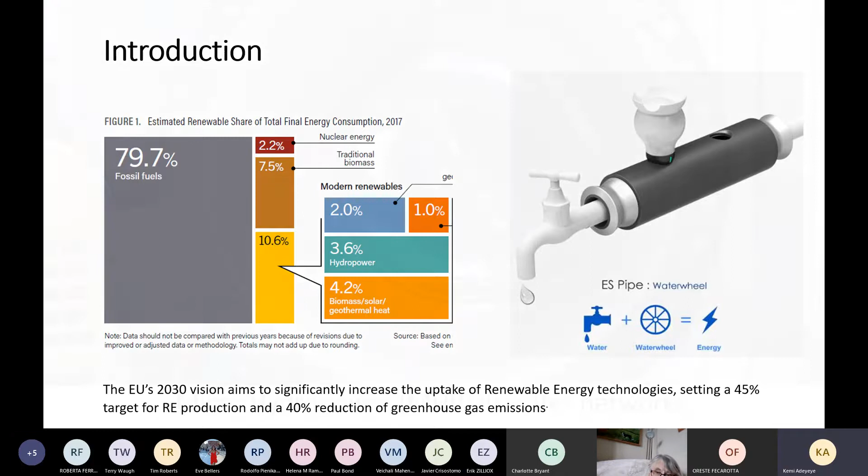Therefore, we cannot dispute that hydropower is a widely available form of renewable energy that can help to reduce the reliance on fossil fuels for the abstraction, treatment, and distribution of our water. It offers a more sustainable, non-disruptive, and economically viable solution.

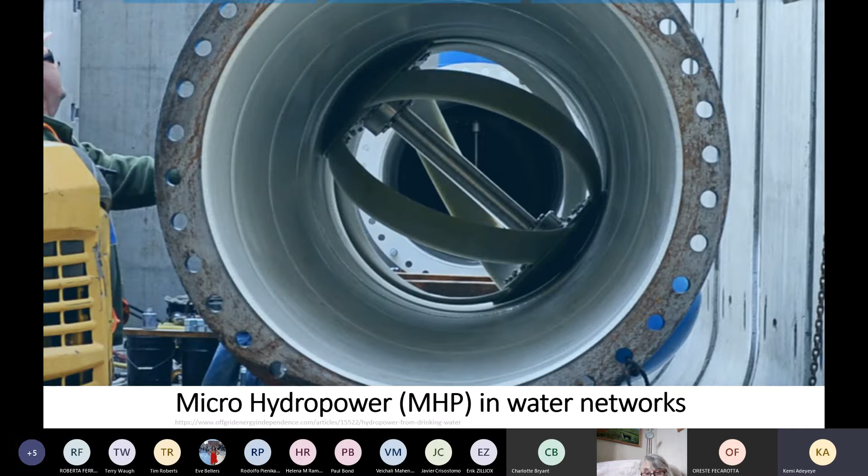For this reason, we're pleased that you can join us today to explore this energy recovery potential in water and wastewater systems, irrigation, and industry networks. The focus of our work is on micro hydropower. Micro hydropower refers to a type of hydropower that produces from 5 kilowatts to 100 kilowatts of electricity from the natural flow of water. Our studies have shown that about 650 gigawatt hour per year can be derived from water networks in the UK, Ireland, Spain, France, and Portugal alone.

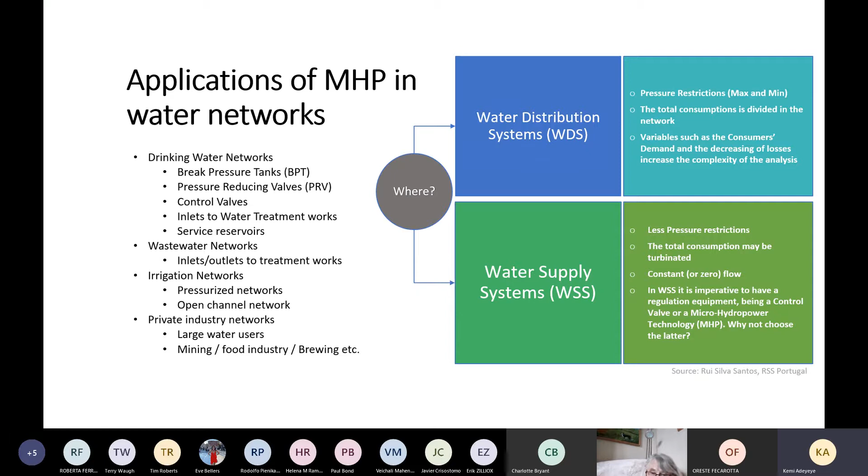As you will hear shortly, micro hydropower offers benefits beyond energy recovery. Across Europe, about 23% of water losses occur in networks. This equates to around 2,171 cubic meters per kilometer per annum. The appropriate design and location of micro hydropower and ancillary devices can help to achieve other network management benefits, including pressure and leakage management.

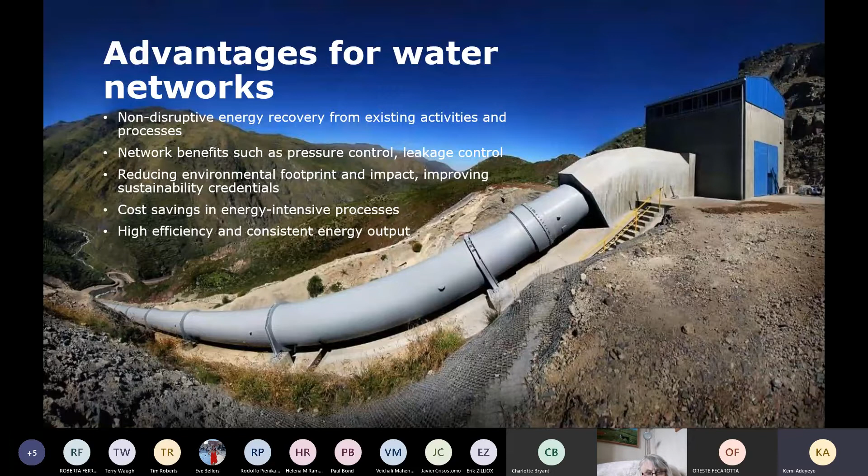Micro hydropower also offers all stakeholders the opportunity to innovate and do things differently. Climate change and other resource factors mean that there are water, energy-related risks that need to be addressed in the water sector. These risks have associated financial impact. Exploring and implementing renewable energy solutions, including micro hydropower, goes a long way in mitigating the environmental, social, and economic risks associated with our water systems and processes.

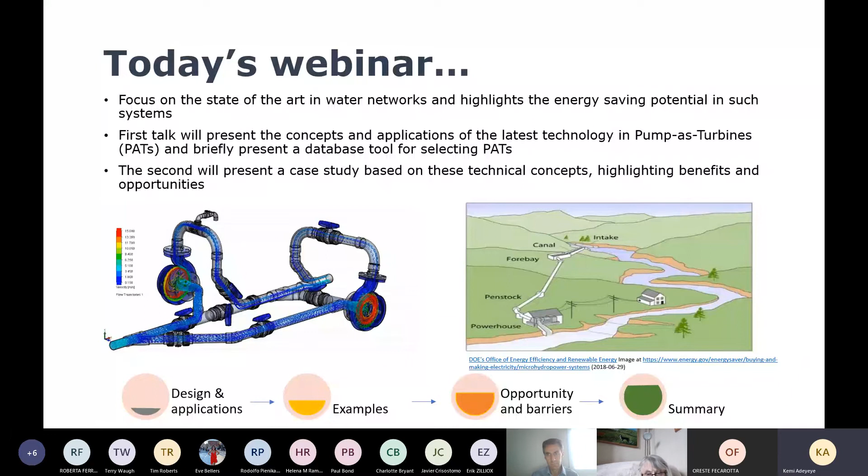Today's seminar will focus on the state-of-the-art in water networks and highlight the energy-saving potential in such systems. The first talk will present an overview of the latest micro hydropower technology, pump-as-turbines, highlighting its technical and economic advantage over traditional systems. The second talk will present a case study where this system has been implemented, demonstrating that this approach also works in practice.

It's my pleasure to now introduce our two speakers and expert panelists for today. Our first speaker is Professor Armando Carravetta. He is a full professor in hydraulics at Federico II University in Naples, Italy. He is a renowned expert in pumping systems, efficiency, and energy production in water networks.

He is also a member of the working group of the European pump manufacturers for the development of the EC standards for wastewater pumps. Our second speaker is Dr. Miguel Crespo. Miguel was a researcher at Trinity College Dublin. He is an expert in energy recovery and efficiency in irrigation networks using micro hydropower solutions. He is also a shareholder of a TCD spin-off, Easy Hydro Solutions Limited.

For today's webinar, I'm also pleased to welcome Dr. Oreste Fecarotta to the discussion panel. Oreste is Assistant Professor tenure track in hydraulics at the Department of Civil, Architectural and Environmental Engineering of the University of Naples Federico II. His research field is mainly focused on the energy recovery and efficiency of water supply and distribution systems. He has developed some research studies on hydraulic structures and on the rheology of non-Newtonian fluid sediment mixtures. He is also responsible for the equipment and lab technicians of the Hydro Energy Laboratory at the University of Naples. Thank you everybody, and now we'll start with the presentations.

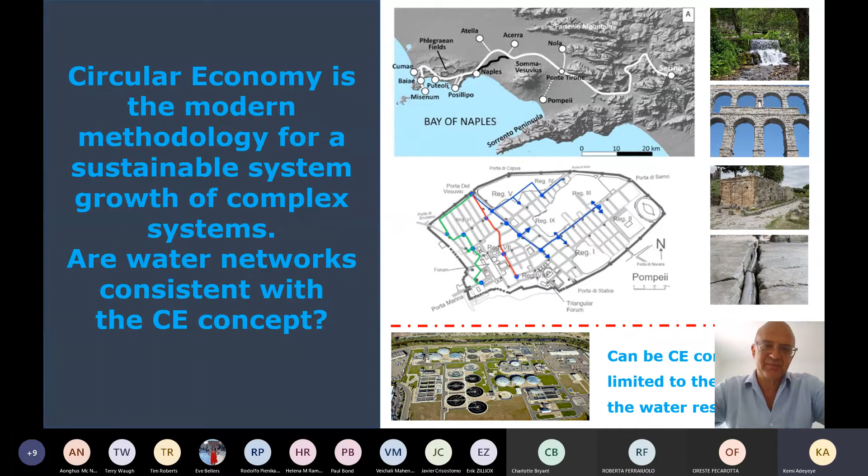The possibility for recovering resources in water networks comes from the fact that water networks are very energy-consuming systems, and a large effort has been made by the European community to improve this efficiency. This concept of low efficiency is connected with a large amount of water lost in leakage, which could reach 40–50% of the water at the spring.

Where is the energy used? Energy is used in pumping for water transportation from one point to another of the network, to overcome high points of elevation. Energy is dissipated to optimize the pressure, because downhill we need to reduce the pressure to obtain an optimal value for the end users. Energy is used in pumping for urban drainage, in the drainage network, and it is used in all phases of the treatment process. The treatment process is very energy consuming, and most of the energy used in water networks is used during the treatment process.

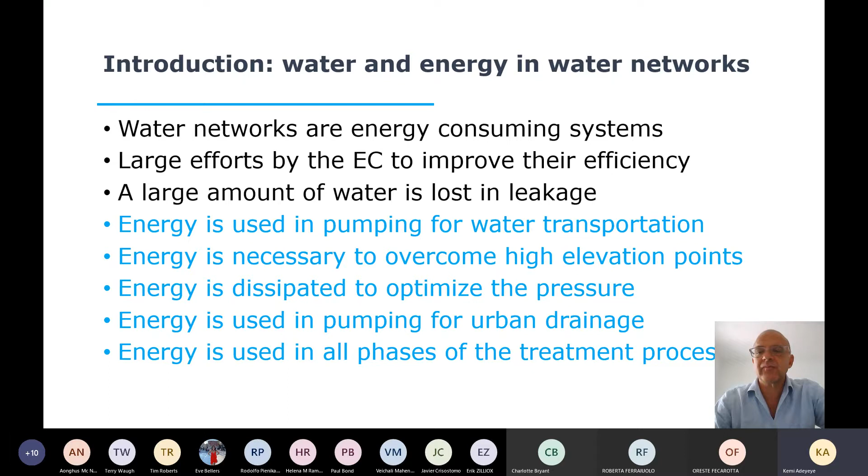The European Community already implemented circular economy concepts through eco-design. In this case, the European Community imposes the use of this circular economy concept by product innovation. So eco-design is the idea of producing better products and devices, in particular pumps for water networks.

In this way, much of the energy that is used now will be saved—not only through the product itself, but also through the integration of pumps with the motor and variable speed drive, and the integration of this group of pump, motor, and variable speed drive within the pumping system.

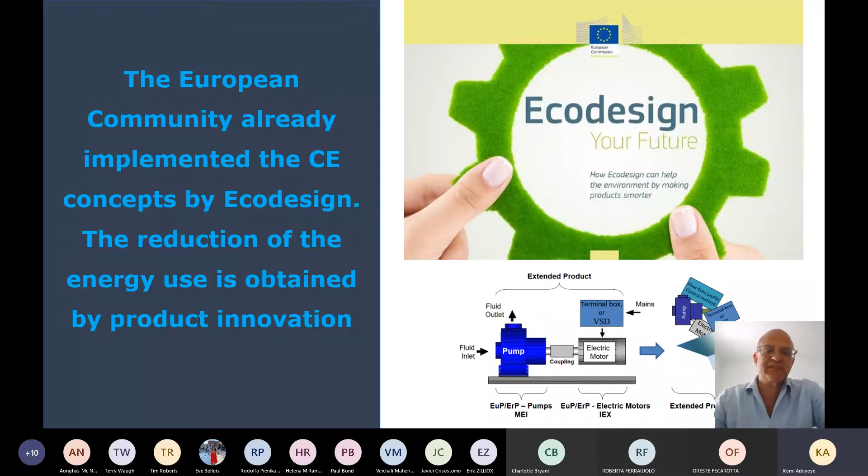The idea of eco-design is that it's hard to obtain savings from a process innovation because water networks are traditionally adequately managed. So in the meanwhile, we push for energy control of this network with new standards. But if we cannot use circular economy for process innovation savings, they can come from product innovation. Pumps and motors are under the eco-design umbrella, and a new minimum efficiency index was introduced for pumps, an extended product approach for pumping groups, so the pumps integrated with the motor and integrated with the variable speed drive, and the dynamic control of pumping systems.

That means we have to check with energy auditing that the correct group is used for the system where it is planned. With this energy audit, we have to check that all pumping systems at the moment are used properly. We can suggest changing some pumping groups that are not efficient enough, and we can check periodically that the new groups are well integrated into the system.

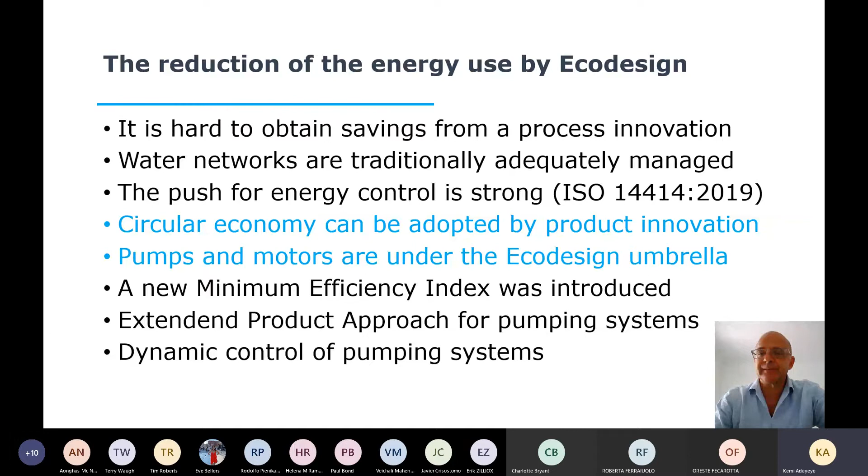Unfortunately, much of the energy stored in the system is simply lost. A large amount of water is lost in the joints and in the breaks of the pipes because of pipe age. And in this way, when we pump water, part of this energy is lost because we are pumping much more water than necessary.

In the meanwhile, the way to reduce leakage is to reduce the pressure, and this strategy has already been implemented. It means we have to flatten the pressure in order to have the best pressure across the whole network. So by reducing the pressure, we reduce the leakage, and by reducing the leakage, we also reduce the energy used in pumping. The novelty of our proposal is in recovering the energy that is now dissipated in the valves, the regulation valves, in order to have pressure containment.

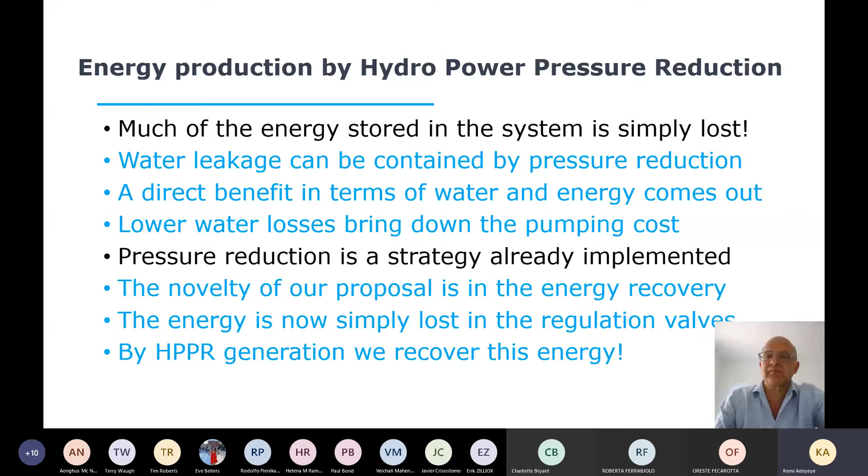We can explain the concept behind hydropower pressure reduction generation, which is the way we propose to recover this energy, by an analogy with F1 cars. The Ferrari 2008 was very different from the Ferrari 2009, not from the aerodynamical point of view, even if some differences are present, but because the brakes that were present in 2008 were substituted by a new technology still used in cars today, called KERS. This KERS is a motor coupled with the axis of the car, so when it's necessary to reduce the speed of the car, the motor comes into contact with the axis and brakes the car through its own resistance. The energy produced by the electric motor is stored in a battery.

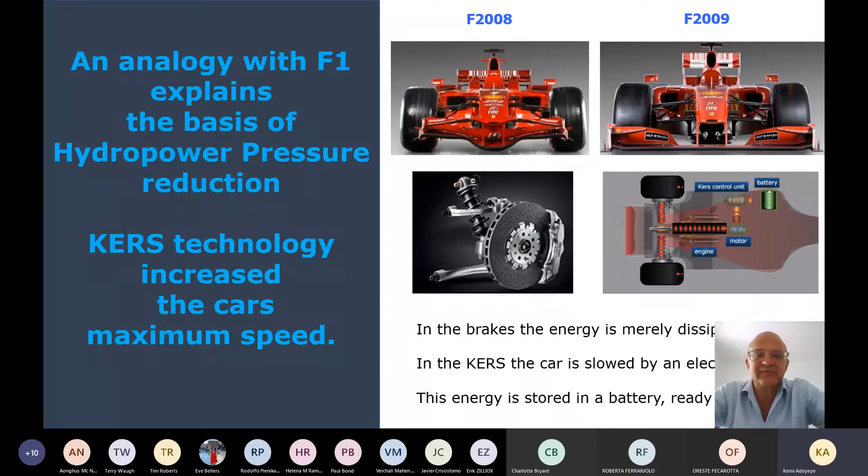The idea is the same as that used in our hydropower pressure reduction technology.

At the moment in water networks, energy is dissipated in the valves. So basically in a butterfly valve, a gate valve, or a pneumatic valve, the current is faster in the valve and then slows downstream of it, and this slowing of the current produces larger vorticity and greater dissipation. In our case, we replace the valves with a hydropower plant station, so the current passes through the turbine or the pump's turbine, and there is an exchange of energy between the current and the rotor of the turbine or pump, so the pressure energy is recovered rather than dissipated. This energy is then stored elsewhere in the electric grid, and the efficiency of the network is boosted, just like in an F1 car.

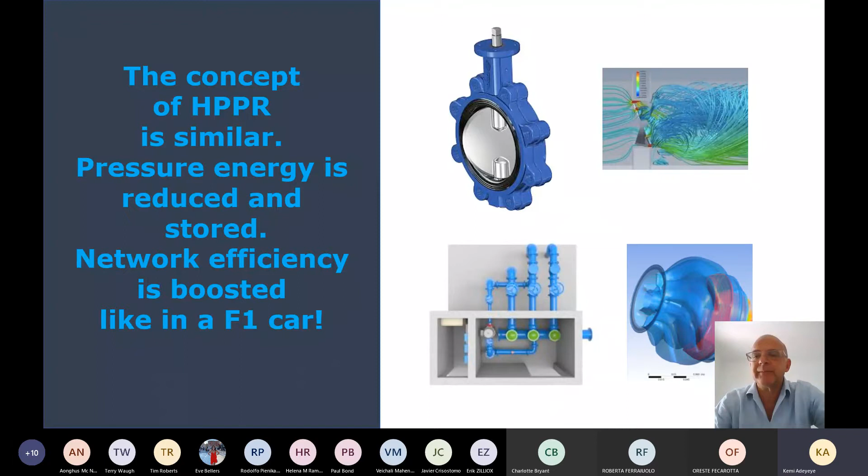Why is pump as turbine technology the best technology for hydropower pressure reduction design? Because we have a very limited hydropower size, so the power is generally below 50 kilowatts and can go down to 1-2 kilowatts.

Pumps as turbines are in this case the best generator for the water manager to satisfy the end user, and so they need a very reliable technology. PAT combines low cost and high reliability. Low cost is necessary because the hydropower site is small and we cannot spend so much on a miniaturized turbine. Reliability is necessary because pumps are very reliable devices, and so a pump used as a turbine - managers are familiar with pumps and will be familiar with pumps used as turbines.

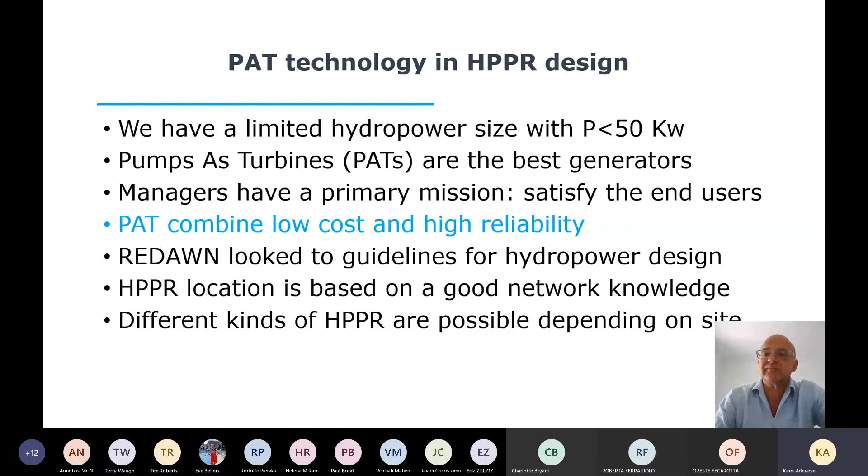So REDAWN looked for guidelines for hydropower design, and these guidelines are necessary to obtain the best location of the hydropower plant in the network, and also because different kinds of hydropower pressure reduction plants are possible depending on the site. By implementing guidelines for diffuse hydropower design, we are giving the principle of hydropower pressure reduction, the basis for hydropower pressure reduction location, and the tools for hydropower pressure reduction design.

Here we see some aspects of hydropower pressure reduction. We have a location where we install the PAT, and by reducing the pressure, we reduce the pressure in the whole branch of the network downstream of the PAT location. We have to look at the pressure in all the nodes, and we have to ensure that the pressure in all nodes doesn't fall below the optimal pressure value for the network and for the end users.

The complexity of the design is in selecting the best point for PAT location or for valve location, and making a proper design of the hydropower plant, considering that the flow rate is changing. When the flow rate is larger during the peak of usage demand, the head that has to be dissipated in order to maintain the minimum pressure value downstream of the PAT is smaller.

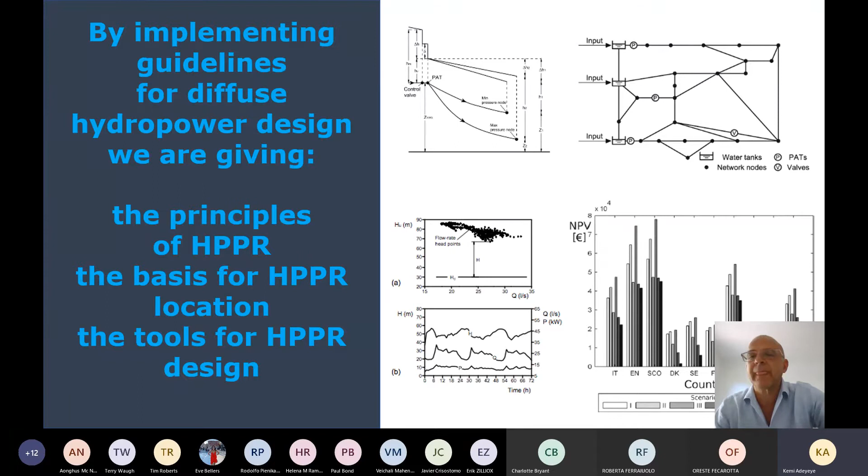So in this guideline for hydropower pressure reduction, we look at the daily variability of flow rate and pressure drop, and the variable operating strategy is the proper design strategy for facing this variable working condition. The geometry of the hydropower pressure reduction plant and the PAT selection is based on the variable operating strategy. To use it, we compiled a database of commercial PATs, and we generated support tools that make it possible for technicians to design hydropower pressure reduction plants.

Pilot power plants were also realized in the REDAWN project and are the most important results of the project, demonstrating that hydropower pressure reduction is now a real choice for the water sector.

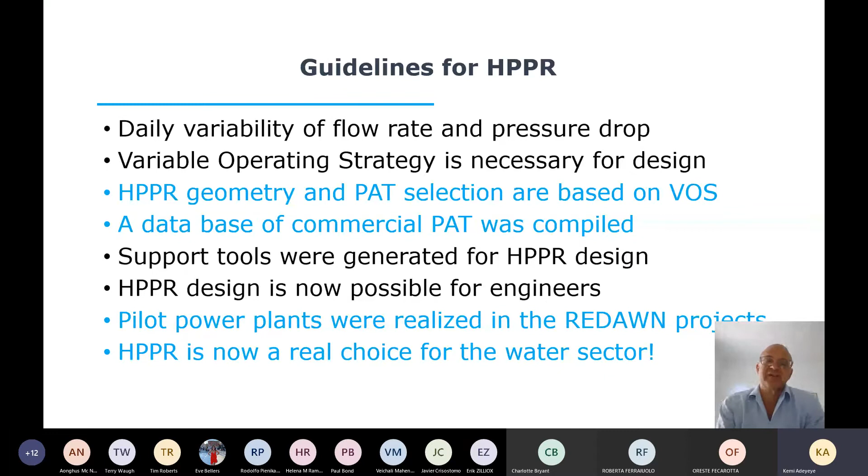Here we see some snapshots of the PAT selection tool that is based on all the performance curves that we collected from commercial PATs. So basically we can select the best PAT given the measures we have of flow rate and pressure head at the PAT location site, and then we can ask manufacturers to check for and offer the best PAT coming from our design tool. But we have to consider this large range from 1 to 50, maximum 100 kilowatts of power.

When the power is very small, meaning in the peripheral branch of the network, we have to save on the cost of waterworks. So within the project, we also developed a new technology: an energy booster technology.

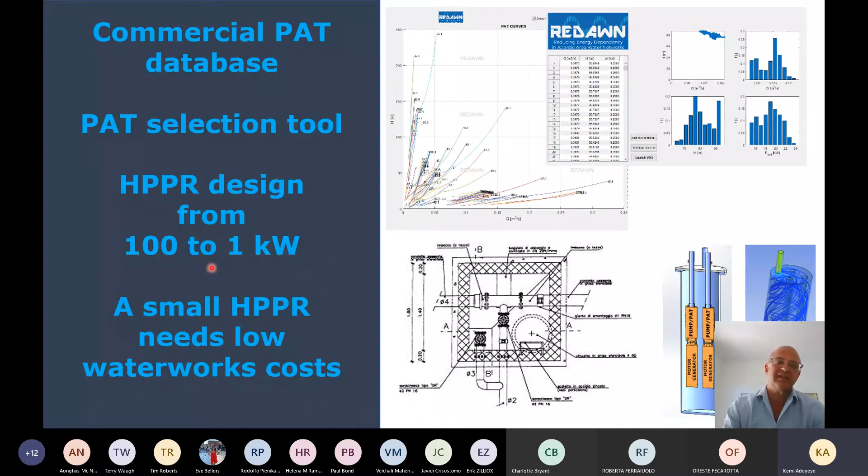In this case, we introduce the PAT as a submersible pump in the booster. We have two PATs that can work in parallel, plus a bypass. This energy booster is a miniaturized hydropower pressure reduction plant that can be easily located in an existing manhole by simply drilling a hole and introducing the booster, without any additional waterworks, without problems of noise, and without problems of humidity for surface motors. So it is a very reliable and promising technology for hydropower pressure reduction that can in the future be extended to higher powers.

Finally, we are very happy to have participated in REDAWN, in this consortium including universities, technical partners, water utilities, industries, and irrigation associations. In case you want to contact the REDAWN project or contact me, here you have the correct address. Thank you for your attention.

Hello everyone, my name is Miguel Crespo, and continuing with the presentation of my colleague Armando, I will talk about the application of micro hydropower and pump-as-turbine technology within the irrigation sector, more specifically its application within on-demand irrigation networks.

Then we're going to pass to hydropower as a potential measure to counteract this energy dependency. And finally, we are going to show how within REDAWN we have demonstrated and validated that pumps as turbines could be used to decrease the energy dependency in on-demand irrigation networks.

Okay, so we are going to start talking about the problematic, and let's focus on semi-arid and arid regions where water is really important, but also where irrigation normally has great weight on the economy, on the national economy. In these regions, a modernization process is taking place that implies the substitution of traditional irrigation hydraulic infrastructures like channels or ditches for pressurized pipe networks. This process was seeking to improve water efficiency by decreasing water consumption.

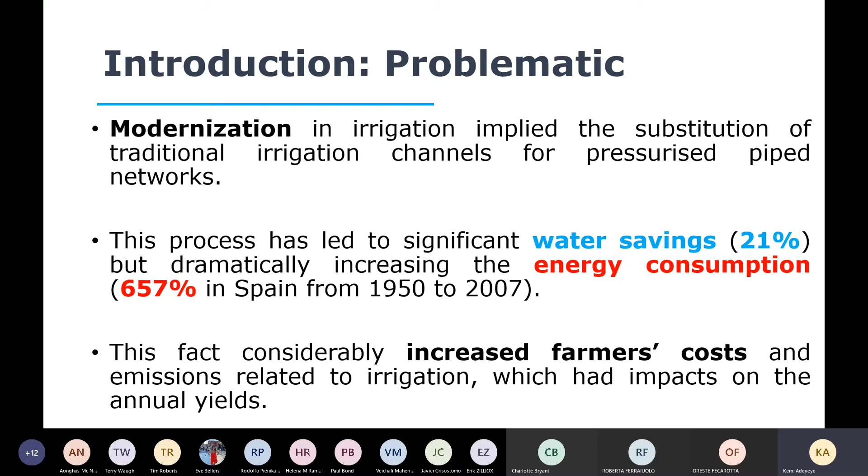Different solutions have already been studied, and some of them were related to network management and exploitation. Another one was seeking to optimize the head required at the pumping station, depending on the consumption points working. And now the use of renewable energies is trending.

For everybody to know, on-demand irrigation networks are similar to drinking water networks, the urban ones. This is due to the continuous availability of water independent of the season of the year. So basically, we have water available 24 hours a day, 365 days a year. And this flexibility, this availability of water, together with the large irrigated areas, makes very likely the existence of excess pressure points.

This excess pressure is normally controlled or dissipated by installing control valves, either in the middle of the network or at the consumption points, to give the right pressure required by the irrigation devices. So one way to decrease this energy dependency is through hydropower energy recovery.

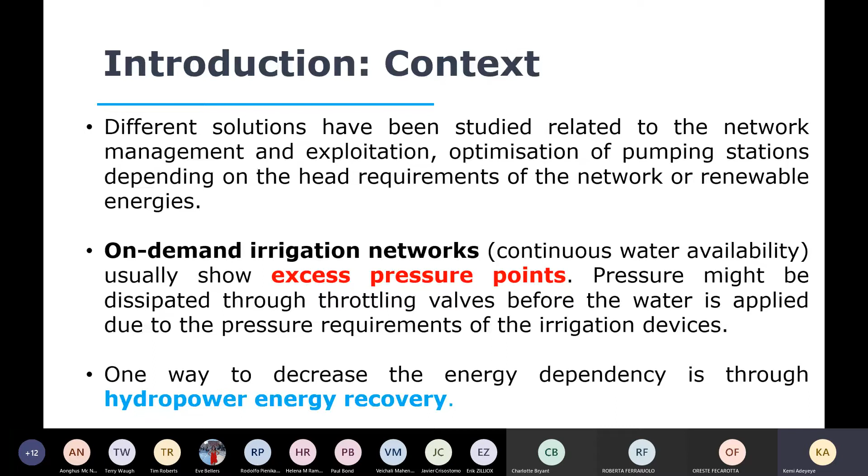Among the different solutions that have already been proposed and studied, we can highlight these four that I already mentioned before: irrigation sectoring, critical points identification, pumping station optimization, and renewable energies.

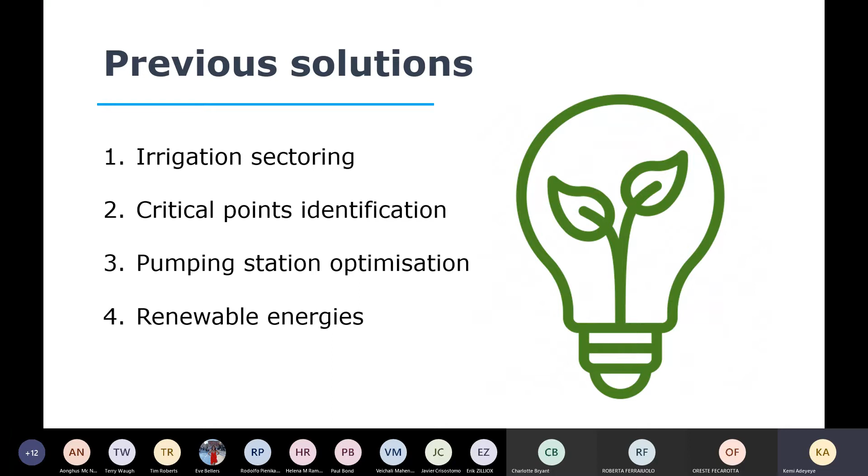Irrigation sectoring refers to the grouping of different hydrants or consumption points with similar pressure requirements. This seems very clear in the figure on the left: on one hand we have the pink area, and on the other, the green one. Basically, we group the irrigation network to irrigate by turn, by groups that encompass the hydrants with similar pressure requirements. These models showed very important energy savings of around 30%.

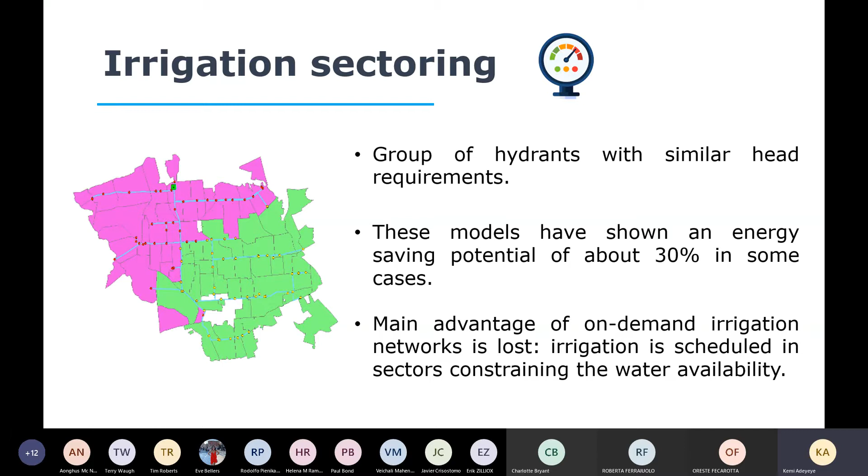However, the main advantage that on-demand irrigation networks have is lost, and that is the continuous availability of water is split into different groups. So farmers need to irrigate whenever they have their turn defined.

Critical points detection is another of the solutions that have already been studied to counteract the increase of energy consumption within the irrigation sector. This solution is focused on the identification and location of unique points with much greater energy or pressure requirements. This is due to a great elevation difference between them and the rest of the nodes of the network, due to remoteness from the water source, or even high head losses from an undersized network at these points. They may increase the global energy consumption of the network, provoking high overpressure in some nodes that need to be dissipated for correct operation of the network.

Variable speed drives installed in pumping stations, secondary pumping stations before these unique points, or even pipe replacements are potential solutions to solve these issues. Critical points detection and their potential solutions have shown energy savings ranging between 10 and 30% of the global energy consumed.

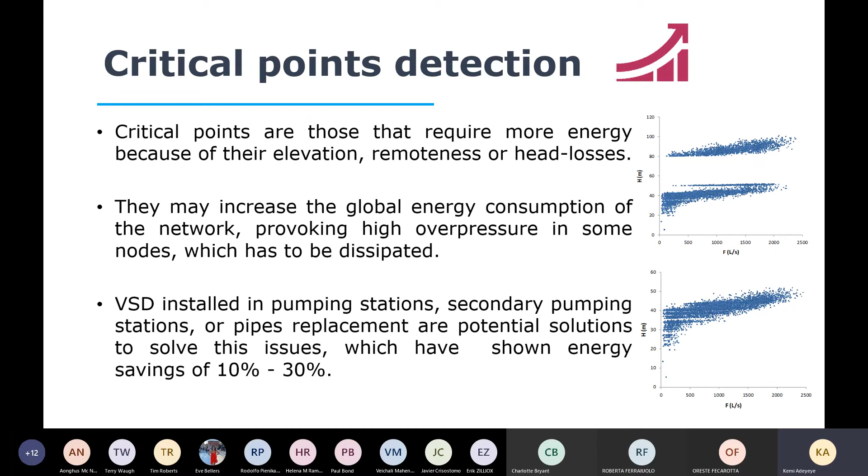Another trending solution is the use of renewable energies. As we said before, the modernization process is taking place in some arid and semi-arid regions, where the annual hours of sun a year is very important. So solar pumping can be proposed, or has already been proposed and used in some regions, to reduce almost completely the energy consumption.

This is very useful for small networks or small farms. However, this is very unlikely to happen in large irrigation networks, as there are a lot of consumption points, and the water can also be required during night periods. Also, in large networks, a significant surface is needed to install enough solar panels to fit the pumping station.

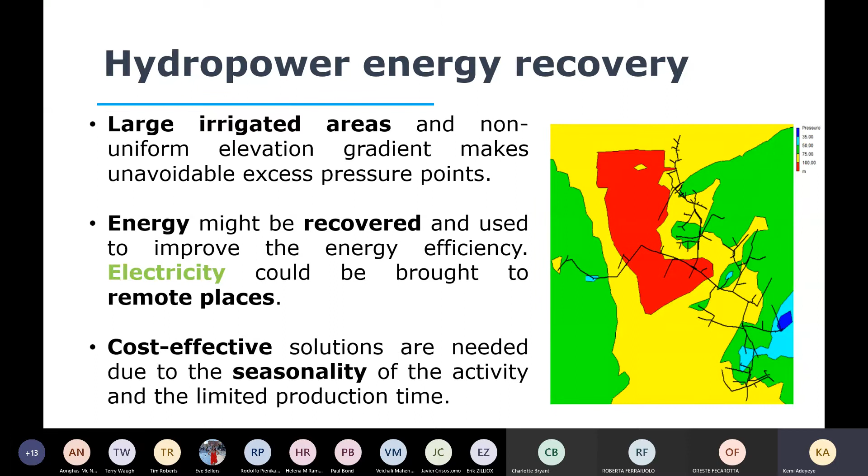So this is where the technology proposed in REDAWN comes in: pumps as turbines. This is just a regular water pump used in reverse, as a turbine. Instead of catching the water and expelling it from one axis, we take the water from the opposite axis and expel it with lower pressure from the opposite axis.

From the very broad literature review, it can be summarized as a SWOT analysis, showing strengths, weaknesses, opportunities, and threats. As a strength, pump as turbine is a low-cost technology. When I say low-cost, it could potentially be around 10% of the cost of traditional turbines, so this is actually a massive, significant money saving.

They also have very good performance at the best efficiency point, and they can be found in the market in a massive way, because pumps are manufactured all around the world, with a lot of working points being designed and manufactured. This can reduce the delivery time for this technology.

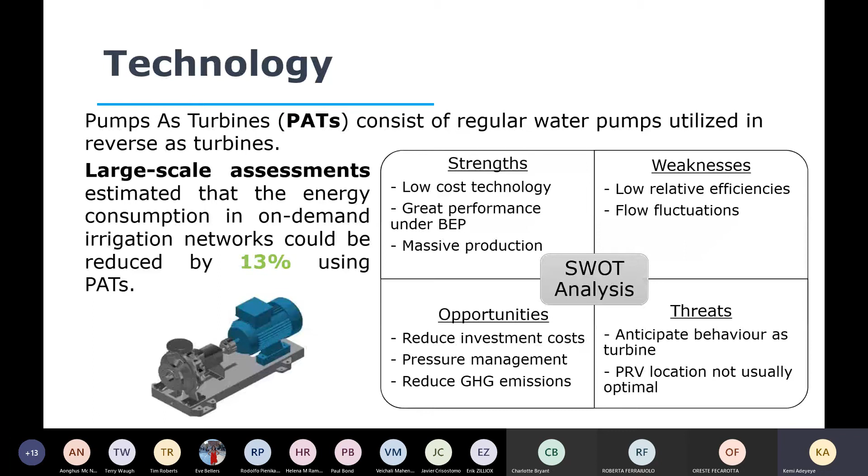As weaknesses, out of the best efficiency point, they could show a low relative efficiency, and this is because of flow fluctuation. So in networks that have significant flow fluctuation, a very careful design needs to be done.

Well, on the demonstration side, this is energy recovery at farm level. In this case, instead of going to a large scale, on the REDAWN project we decided to go to a small scale to provide energy to a farmer.

Why was this an attractive solution? Well, on the one hand, we had a hydrant from which the water was taken for the farmer, and was supplied in the irrigated surface close to the hydrant.

They also had energy consumption, but there was no electric grid. The energy was generated by a diesel generator. So here we had two positive points: excess pressure on the hydrant being reduced using a pressure reducing valve, and energy consumption at the farm supplied by a diesel generator. So using PATs, or energy recovery, in an on-demand irrigation network could be proposed as a potential and attractive solution to bring electricity to remote places.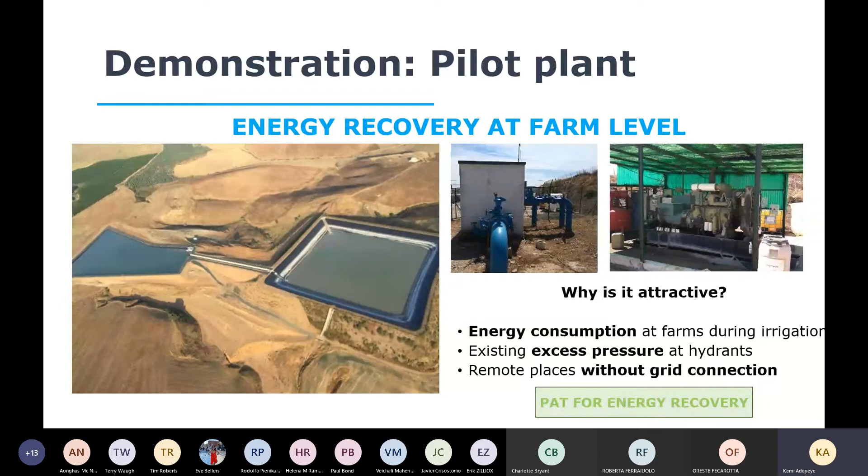When designing this pilot, the first thing we needed to confirm was the existence of excess pressure at the hydrant. We can see how the pressure varied along the months within the irrigation season. Starting in March, we had almost 90 meters of pressure, and then in the most intensive irrigation stage of the season, around 55. Normally, the pressure required at the hydrant for the right operation of the farm was 35 meters, so we had a minimum of 20 meters of excess pressure being dissipated.

Also, we had a flow that varied between 65 and 190 liters per second, as the farm irrigated around 300 hectares of walnuts. The energy requirement at the farm was being supplied by a diesel generator, 7 kVA. This diesel generator powered two fertilizer pumps of around 2.2 kilowatts total, an air compressor of 1.1 kilowatt, and a filtering station of around 0.3 kilowatt.

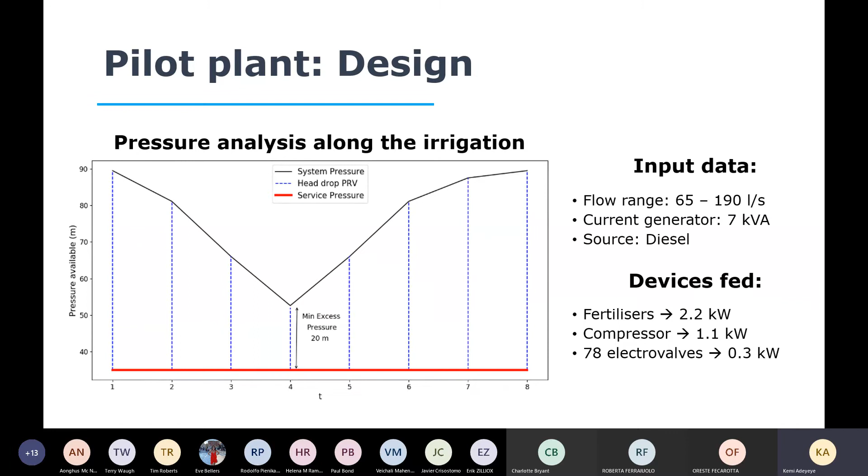Using the input information shown before, and keeping in mind that we had at least 20 meters of excess pressure during the whole irrigation season, the ideal PAT to be installed in this case had a nominal power of 4 kilowatts. This was installed on a farm located in southern Spain, in Palma del Rio, and the main target was to replace the diesel generator used while the farmer irrigated.

The initial scheme of the pilot plant was this: the PAT was installed in a bypass of the main irrigation network, and to monitor a bit the working condition of the PAT, we installed a flow meter and some sensors to control the pressure and other parameters.

This is the existing situation before the installation of the PAT. We have this diesel generator feeding the filtering station and some fertilizers, and the air compressor used for maintenance of the farm. Then we moved to this new situation, where we have a bypass in which the PAT was installed, taking advantage of the excess pressure that existed at the farm.

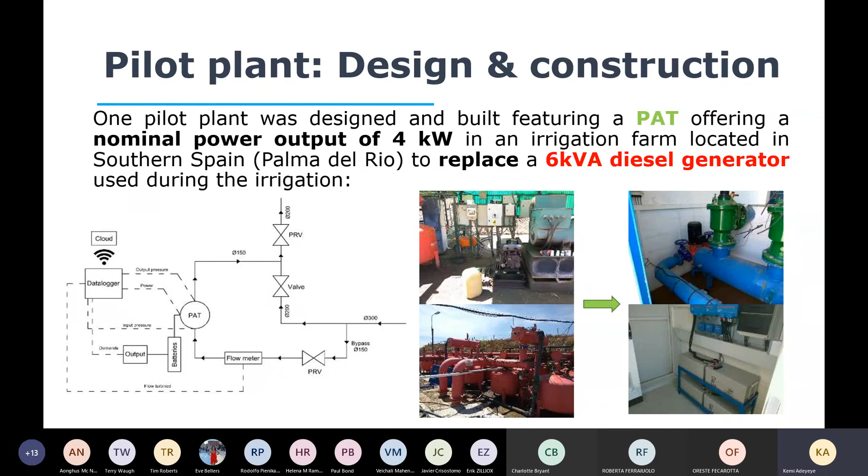Finally, with the pilot plant, we validated that the technology could be useful for this kind of infrastructure, to be used within irrigation networks. It also validated the idea that it could be used to bring electricity to remote places. In the first 15 months of operation, the farmers saved more than 3,000 euros and avoided more than 12.8 tons of CO2.

But we also need to take into account that in 2020, the cost of diesel used for the generator dropped due to the COVID situation. So we expect that in the next few years, these economic savings will increase importantly. The payback period, taking into account these numbers and the cost of installation, showed that this kind of solution could be attractive for farmers, as they could recover their investment in less than 10 years, with a lifespan of around 25 years.

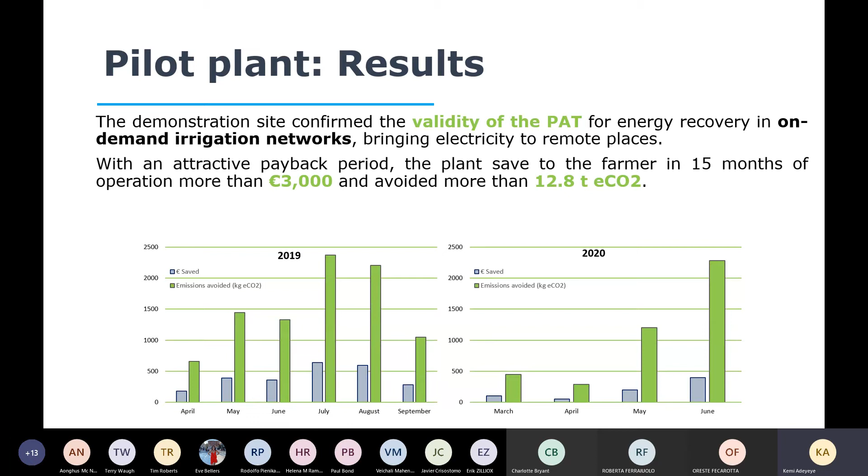So I hope that you enjoyed this presentation, and overall that you foster hydropower for energy recovery. Thank you very much for your attention.

Can you hear me? Yes, we can. If we have a pumping system, as Oreste explained, some pipe branches can operate as gravity systems connected to the main pumping system. In this pipe branch, if we have excess energy, we can implement a pump-as-turbine solution there. That's more or less the summary. I tried to write it in the chat.